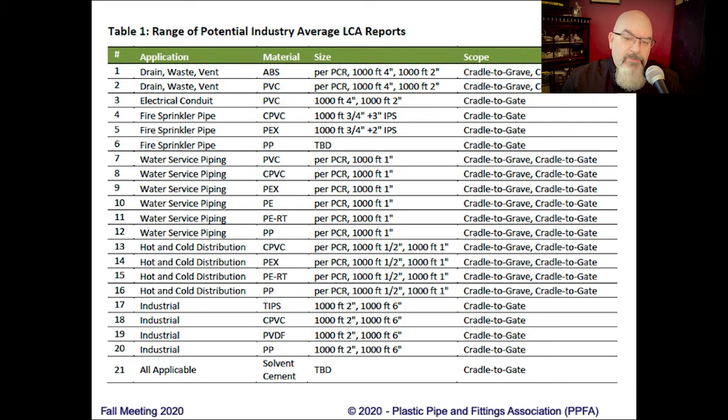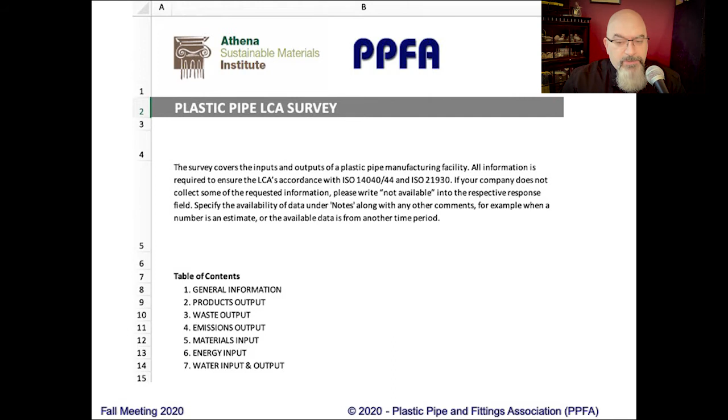Here's a quick teaser of the first draft survey form in Excel. There are 8 tabs in the Excel sheet, covering a different series of inputs, so that the vendor can calculate the impacts of the products being studied. You may need multiple plant people to answer all of the questions found in the survey, and they should be allocated only to the products that we have decided to study. The data is confidential and should only be shared with the vendor.

TEPFA, the European PPFA, has recently updated its own EPDs, mostly because of the updates to the resin database. They have exactly the same number of products, but obviously use different sizings and different materials such as gas piping and other products we don't have. If you are interested, however, they are online at TEPFA's webpage.

Here are the areas I can give you a brief update on. Many of these have been delayed because of the pandemic. ASTM, especially E60, USGBC's LEED program, GBI's Green Globes, ASHRAE's 189.1 and 514, IAPMO's WE-Stand, and we also had a member inquire about the Declare label.

The ASTM physical meetings have recently all been halted, so we don't have much to say here. We continue to monitor and vote when needed on all ASTM meetings, but especially E60. The USGBC's LEED program has something of an advantage right now in that the meetings were already being held virtually. I am currently the vice chair of the Water TAG, the Technical Advisory Group, which allows me access to the main technical committee meetings.

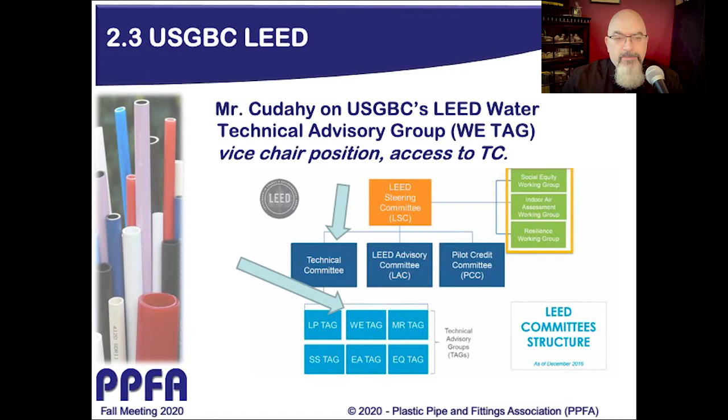Ongoing development is still stalled a bit. The newest iteration, version 4.1, is out. In the water section, the changes were quite limited. Only the section dealing with cooling towers was altered significantly. Going forward, we are more interested in the quality of water and including the new leak detection devices. We want LEED to adopt consensus do no harm type standards like ASHRAE 514 and not some concocted third-party invention.

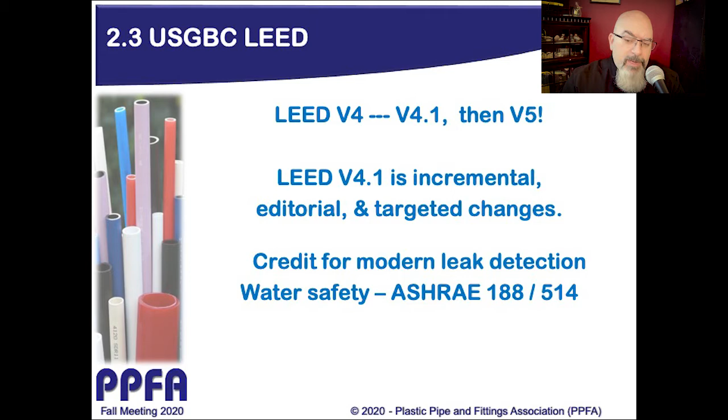USGBC is still very interested in having better alignment with the green codes like IGCC, which is being developed by ASHRAE 189.1. That will be the minimum green building standard, and they want LEED to neatly overlay those requirements, and that is not easy to do.

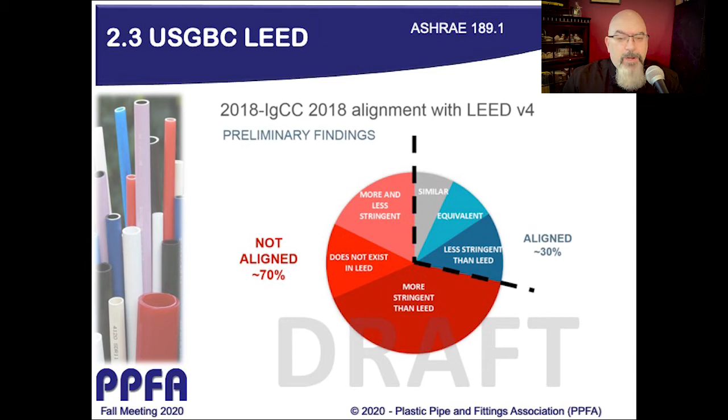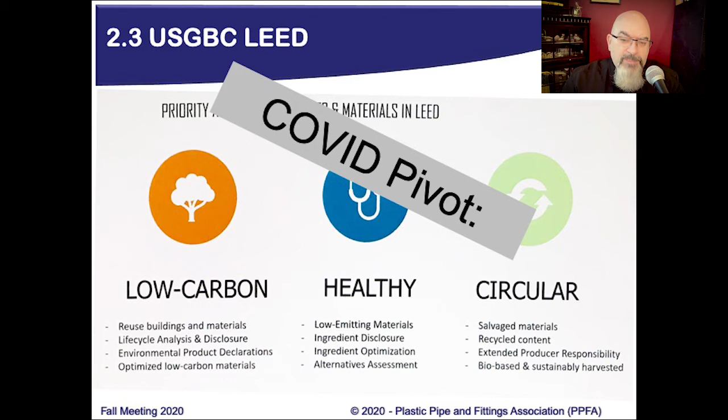A quick pivot for USGBC has occurred from the carbon health circular economy we reported to you just at the last SPS meeting to a new one, healthy people, healthy places, healthy economy. This was driven by the pandemic. COVID is certainly impacting everyone, including USGBC, as everyone is attempting to see where their programs fall short and issuing how to safely reopen and occupy building documents. This is also a water age problem.

Green Globes has been released. It is now in continuous maintenance. I am the GBI chair for the Water Committee. I'm also on the Point Allocation Group and the Materials Committee. Continuous maintenance means there aren't set timelines for development, and proposals can be developed at any time by anyone, making for more meetings. Asking for subcommittee proposals for leak detection points, for the smart and passive systems, and healthcare exceptions for fixture flow rates.

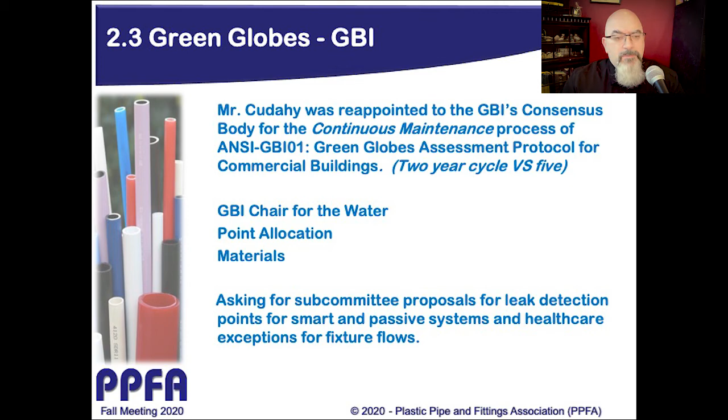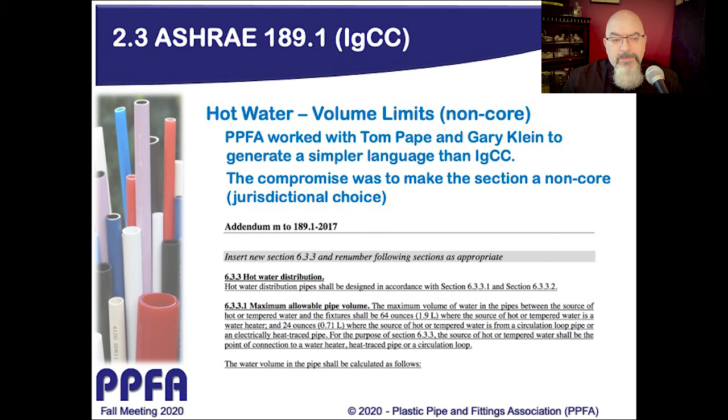ASHRAE 189.1 is developing the basis for the ICC's International Green Construction Code, or IGCC, and we are always in a fight over volume and length limits for hot water lines. Volume limits are more appropriate and show better performance for plastic piping systems like CPVC and PEX. As in the other systems, we are also asking for the smart leak detection devices to be included to the system. A task group has just been formed.

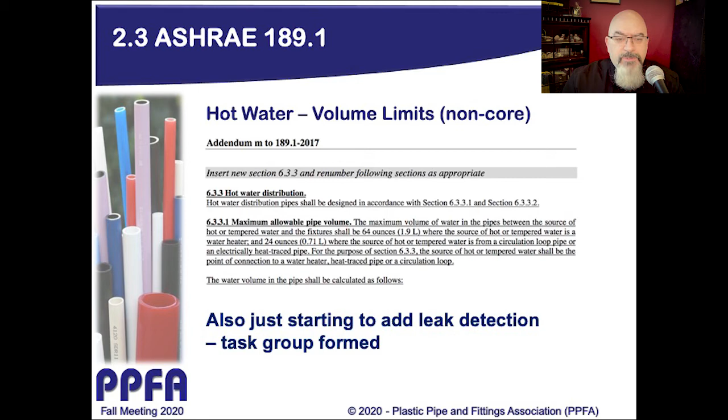ASHRAE is developing 514, although progress has been delayed by the pandemic. 514 takes off from the 188 standard. 514 will cover design and maintenance of building water systems to reduce hazards, but instead of just considering Legionella, it will cover a number of pathogens, thermal hazards, and chemical hazards like corrosion, disinfectant levels, and disinfectant byproducts. It will be an important standard to include in green building programs and will head off unusual third-party programs that could treat us unfairly.

The IAPMO WE Stand is the water and sanitation standard. An interesting development will be how long hearings are remotely done, and I may learn that from attending these remote committee meetings. These are short days, but run over many more days than usual to limit participant fatigue as we slowly all go blind looking at our screens all day. It may be the future of hearings.

We were asked to give a quick review of the Declare label program and its use in green building. Declare is a transparency ingredient listing third-party program. Unfortunately, the program contains a red list. The red list includes chlorinated polymers, even neoprene, organotins, chlorinated paraffins, wet-applied VOCs, and other materials. Living Building Challenge and LEED both accept this program for points.

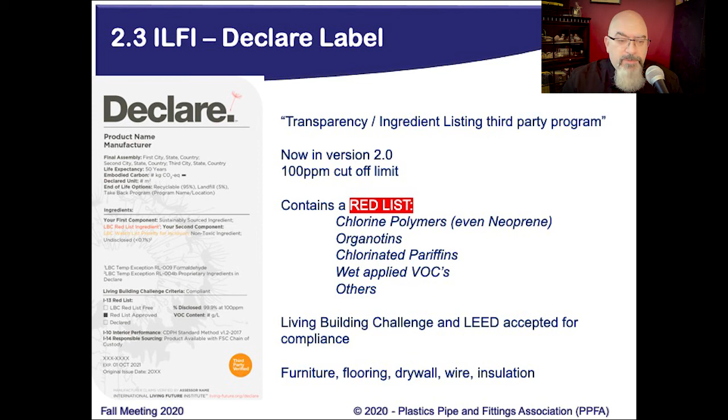Things in the database include furniture, flooring, drywall, wire, insulation, and other materials. Note the points here are given for 20 permanent products in the building. There are 9 accepted ways to label in this program, one of them being the Declare program.

So in summary, most programs are now in a continual maintenance phase. The changes are mostly evolutionary, editorial, or simplification for helping increase adoptions, not really sweeping changes. This might change due to the pandemic.